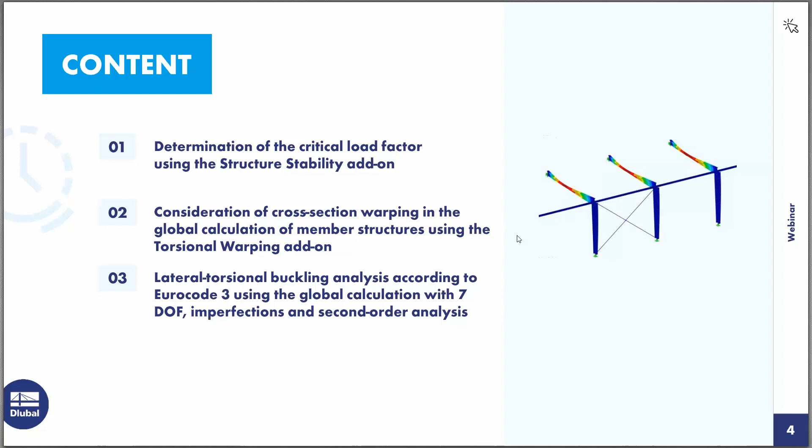The first thing we want to look at is the structure stability add-on. Here's a short overview of its features. We can use the structure stability add-on to determine critical load factors for our structures, and calculate models consisting of member, shell, and solid elements. In this webinar I'm going to present members in the structure stability add-on because we also want to show the combination with the 7 degrees of freedom calculation. I think shell elements and solid elements will be part of another webinar in the future.

Another feature of the structure stability add-on is the nonlinear stability analysis. We use incremental loading to also calculate nonlinear systems. There's also an option that helps determine the mode shape of an unstable model so we can find the cause of the instability. We will look at this in the webinar today. We can also have a graphical representation of the stability mode shape and use it as a basis for determination of imperfections.

In the first example, I want to use a simple model in RFEM to show you the basics of the input for the structure stability add-on, and also which results we will get from the calculation with the structure stability add-on.

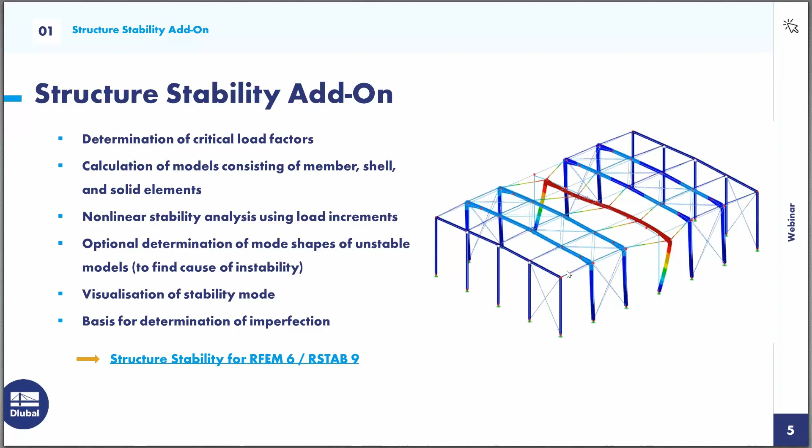So I will switch to RFEM and we will have the first example. It's a very simple example in this case, a simple steel frame with rigid frame edges and simple supports. Now we have one loading condition, so we have vertical loading and a horizontal load. We want to look at all the settings necessary to perform a stability analysis with the structure stability add-on for this example.

First, if you want to use the structure stability add-on, we need to activate it in the base data dialog. So I go into the edit model base data dialog, and then we have this tab for the add-ons where we can activate the structure stability add-on.

You have probably noticed that in the main tab of the base data, we have chosen the model type 2D. So if we have chosen only this 2D model type, the structure stability analysis will also be performed in this 2D plane stress environment. So in the first step we will see only mode shapes for this 2D structure.

Now that I have activated this add-on, we will see in the data navigator that there's an additional stability analysis setting. Without the stability add-on we don't have this setting, but now it's here with two predefined stability analysis settings already.

If we open the first one by double-clicking on it, we see that in the stability analysis settings we can set all the options we want to consider for our stability analysis, including the important choice of stability analysis type.

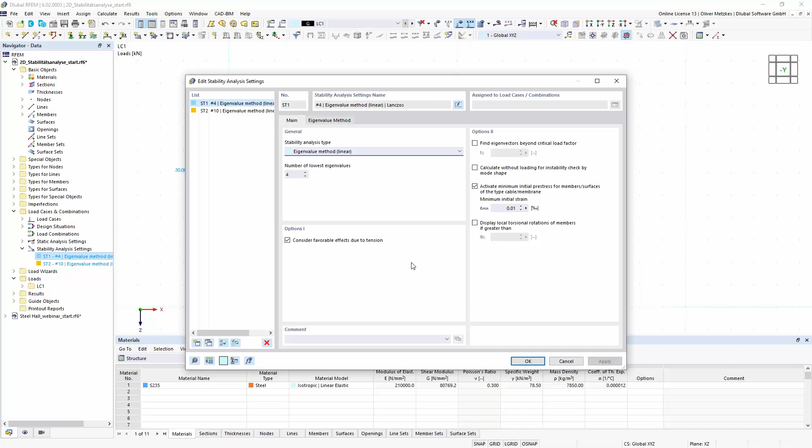We have this linear eigenvalue method for determination of the critical load factor, and also an incremental method for calculating nonlinear systems. In my example, I only want to use the standard eigenvalue method for the linear system, and I don't want to change the other options for now.

When we have our stability analysis setting, we can assign it to our load case to start the structure stability analysis. I can edit my load case number 1 by clicking the Edit Load Case button, and then we see that if we have this stability add-on activated, we have an additional option: Calculate Critical Load Structure Stability Add-on.

If we activate it, we can choose from the drop-down list our corresponding stability analysis setting that will be applied for our stability analysis.

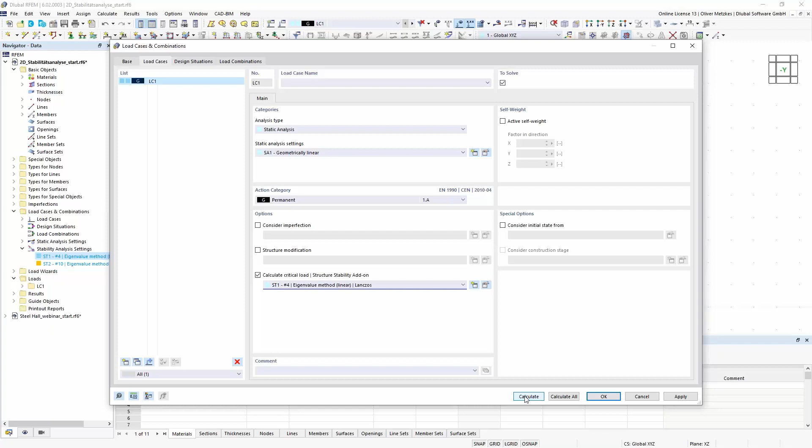If I calculate now my load case number 1, we will see in the calculation diagram that first the static analysis is performed, and that is used as a basis for the stability analysis. Once calculated, we get the internal forces and support reactions for the static analysis, and we can also switch to the results of the stability analysis.

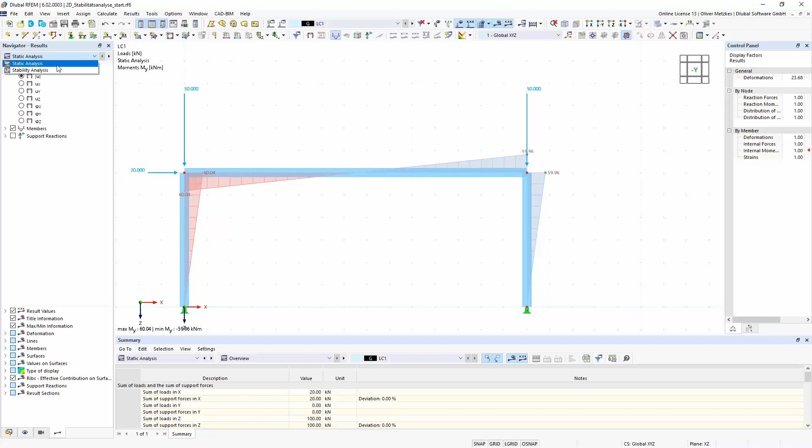In the navigator for the results, we have a drop-down list where we can switch between static analysis and stability analysis. If we switch to stability analysis, we will see the graphical representation of the mode shape, which by default for the members is represented by a line display.

We can also choose the display mode. Here in the navigator for the results, we have options at the bottom. If I choose to display my deformations for the members by colored sections, I will get this colored representation with sections, which is mostly easier for imagining the mode shape.

I also get the results in tables. In the result tables for stability analysis, I will see my critical load factor corresponding to the first mode shape. For this example, the first critical load factor is 33.6, meaning that if I multiply the load of load case number 1 by 33.6, I will get stability failure with this mode shape of my simple frame.

So that is the result I get, and I also get further mode shapes according to the setting I have set in the stability analysis settings.

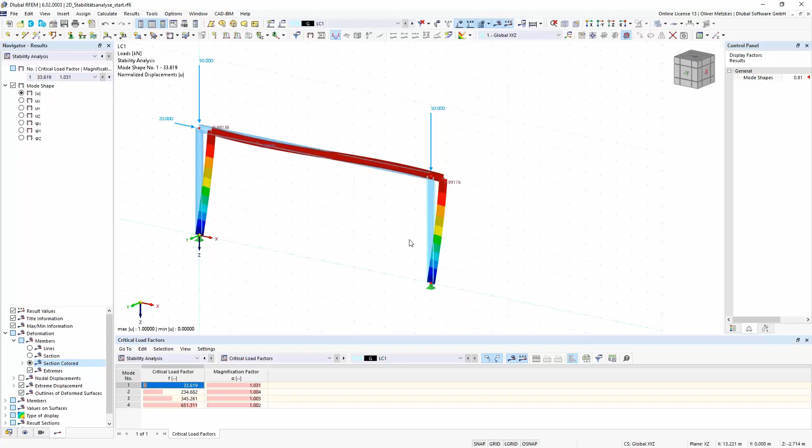Now, I have said this is only a 2D structure, so the first mode shape is this in-plane flexural buckling of the frame, and I don't get any out-of-plane buckling shapes. If I also want to consider out-of-plane buckling, I can go into my base data dialog and change the model type to 3D.

I will do so. And then I can just try to calculate it again. I will see that I have not changed anything with my support conditions.

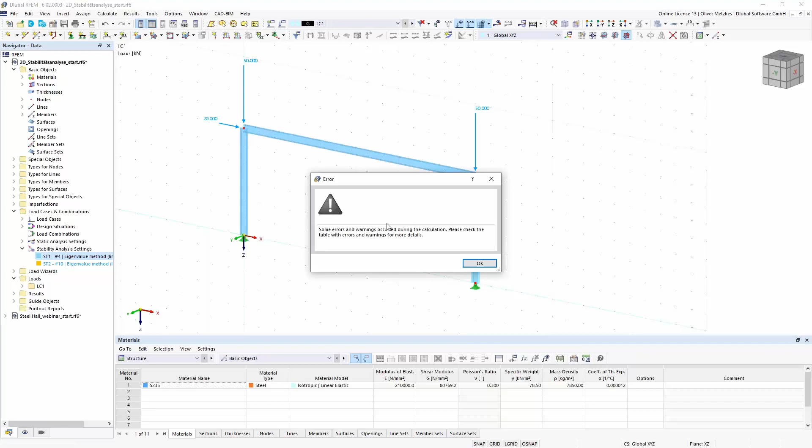So the result of the calculation in this 3D model environment will be an error because the structure is unstable. For my easy structure, it's very easy to determine the cause because I have not changed my supports. I have simple supports here, but I don't have any support in the out-of-plane direction, so it would be easy to say there are supports missing.

But also if you have more complex models and get this error for instability, the structure stability add-on can be helpful. As mentioned in the overview, there's another option: if we go into the stability analysis settings, we have this option for calculation without loading, for instability check by mode shape. We can use this method if we think there may be an instability due to modeling issues, if maybe you have forgotten a support, or also if you have nonlinearities.

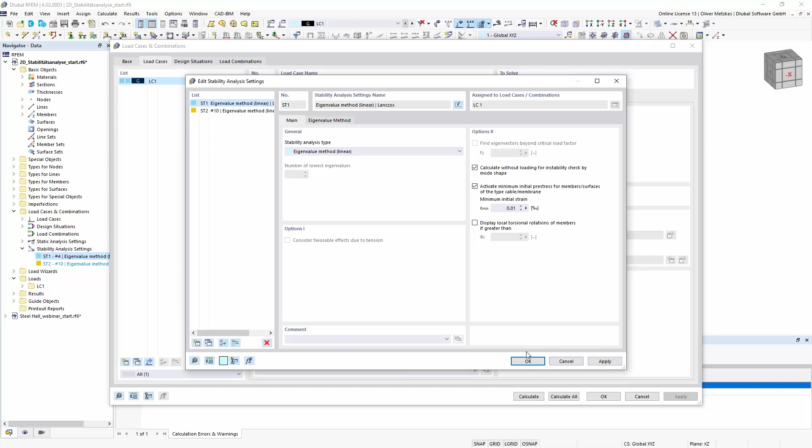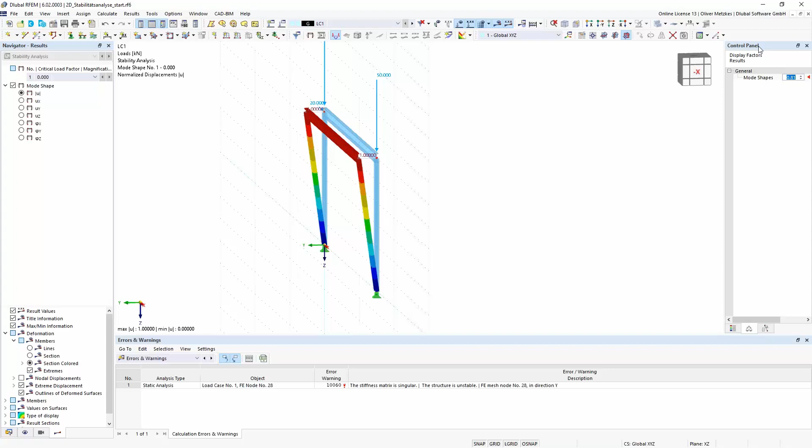Okay, to check if it's maybe a modeling problem that your structure is not stable, you'll get the mode shape of the unstable structure and can easily see what the problem is. In my case, I don't have any support in the out-of-plane direction, so the frame will have high deformation with no restraint, and it won't be a stable structure that can be calculated.

This option is in the structure stability add-on that can help with modeling issues causing instability. In my case, it would be easy, I just wanted to place some supports here, so I will have the supports in the Y direction at the frame edges. I select the Y direction and assign it now to my frame edges, here and the other one.

Now I can change the setting back so that I calculate my mode shapes with loading to get the corresponding buckling shapes. I will calculate it again, load case number 1, now also in the 3D model environment, so I would expect to get also out-of-plane buckling shapes.

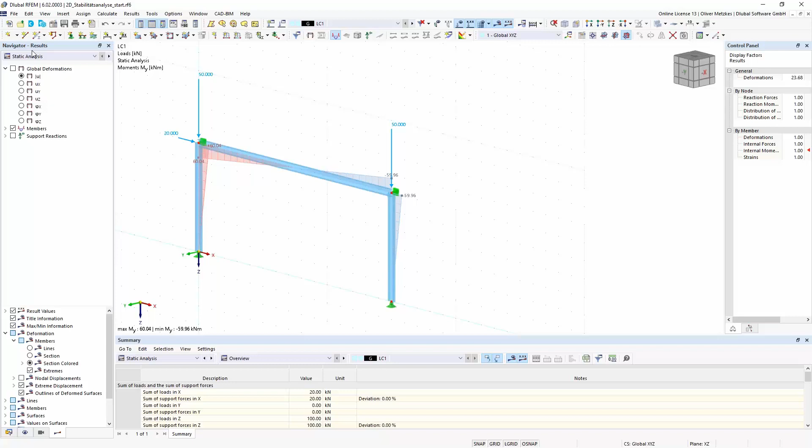I switch to stability analysis results, and now I see that the first mode shape is no longer this in-plane buckling, but now we get also out-of-plane buckling for the beam and also for the columns. For example, for this column, I now get this mode shape for out-of-plane flexural buckling with a critical load factor of 13.

So the result of the stability analysis add-on is not only the critical load factor and the mode shape, but we also get the calculation of critical loads and of buckling length. If we go into the result table, results by members, we also have additional tables like effective lengths and critical loads by member. Using this load amplifier, the stability add-on automatically calculates critical loads for each member and then determines effective lengths and, corresponding to the member length, also effective length factors.

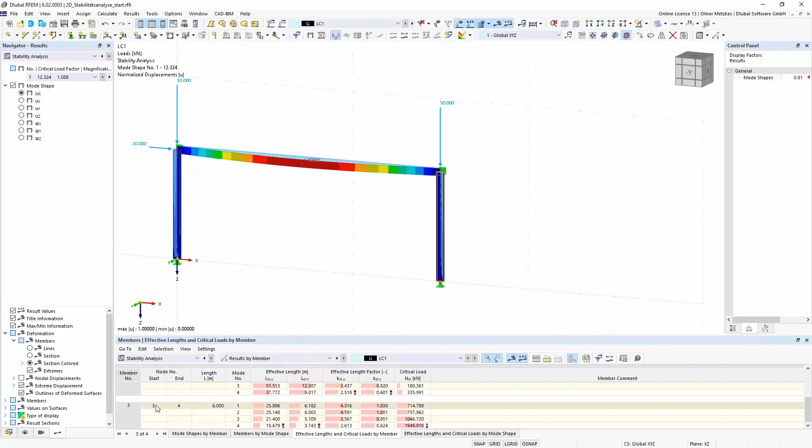So if, for example, we want to look at the effective length of this column, I click on it, it's member number 3, then we have to look also at results for mode shapes where this member is affected. Mode shape number 1 would be for the beam, but mode shape number 2 is the one for out-of-plane buckling of this column.

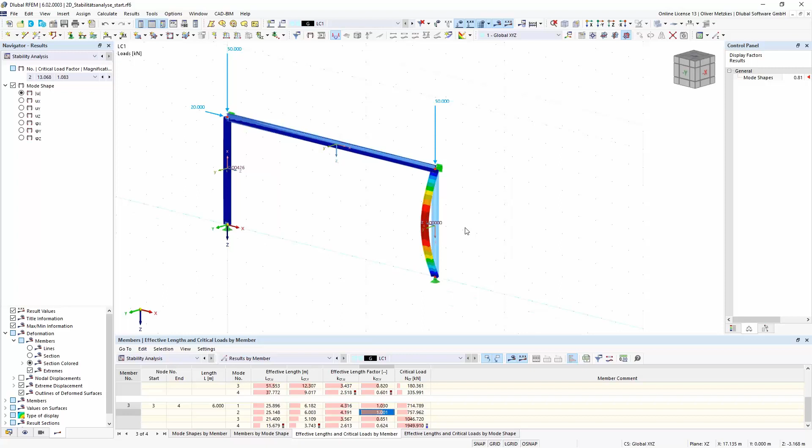As it is out-of-plane buckling, it would be buckling around the weak axis. We can also display the axis system, so buckling around the z-axis, and the corresponding principal axis now would be the v-axis. So we have to look at member number 3, mode shape number 2, and L critical V. It's an effective length of 6 meters, and the corresponding effective length factor would be 1.0. That is as expected, since the critical length for this column with hinged support conditions at start and end would be the member length. So this would be the effective length for buckling around the weak axis.

Buckling mode shape number 4 is still this in-plane flexural buckling, that would be for buckling around the strong axis. So member number 3, mode shape number 4, and now it's L critical for the U, around the U axis, around 16 meters, and this effective length factor of 2.6. Those values could now be used if we want to perform stability design checks according to the equivalent member method, then we could also use these effective length factors for the further design.

So we get from the stability analysis results: mode shapes, critical load factors, and also effective lengths for the members. I think that is good, we have seen all this input on this simple example.

Now I want to also give you some hints about the behavior of the stability analysis add-on in a 3D model, so I switch to my next model for this webinar. It's a steel hall with simple frames, rigid frame edges, simple supports, and standard loading. I have simplified it a bit, so I only have self-weight and snow load, and wind loads only one per direction, so I have not considered the negative ones, for example. It's a bit simplified, but I think for our example today it's a good example.

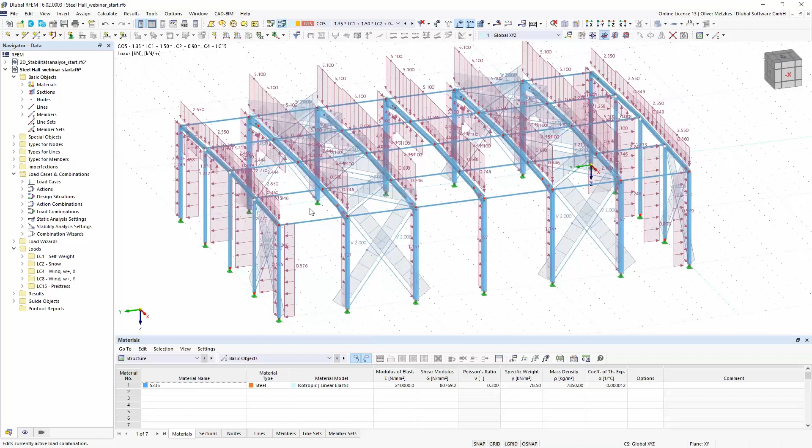Now we also have the stability analysis settings in here, and we can assign it to our load case. So if we want to determine the critical mode shape, we can select a load combination where we think we have the most governing load, like combination number 5. I can also activate this calculate critical load for the structural stability add-on and calculate it. So we can also assign this setting to load combinations and not only to load cases.

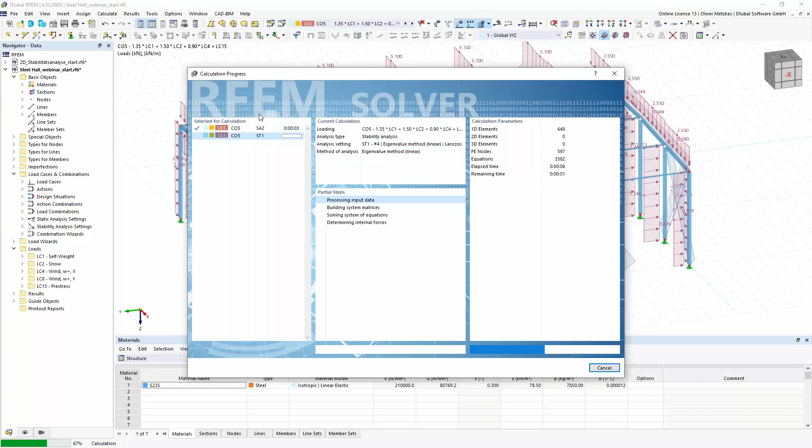So now, again, first static analysis of the load combination and then stability analysis using the internal forces that have already been calculated. So now we see the mode shape number 1 for the critical load factor of 18 in load combination number 5 is displayed here.

So now that's only one load combination. For a structure where we have lots of load combinations, it would be interesting to find out the one that would be the governing one for the stability analysis. So the wish would be to analyze the stability of all the load combinations and not only one load combination.

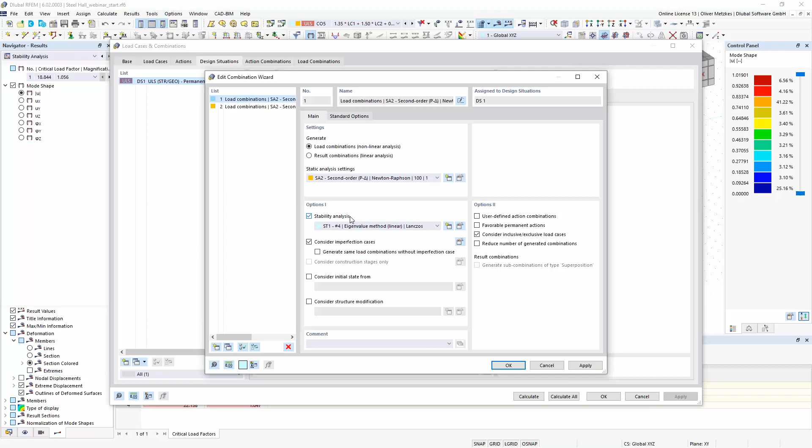So that is also possible. We can go into the combination of the loadings, so design situations. And as you probably already know, all the rules for the combinations are set into this combination wizard. So we can also modify the combination wizard, and there's an option for stability analysis. With the activation of this option, we can also activate the stability analysis for all our load combinations that are created by this combination wizard.

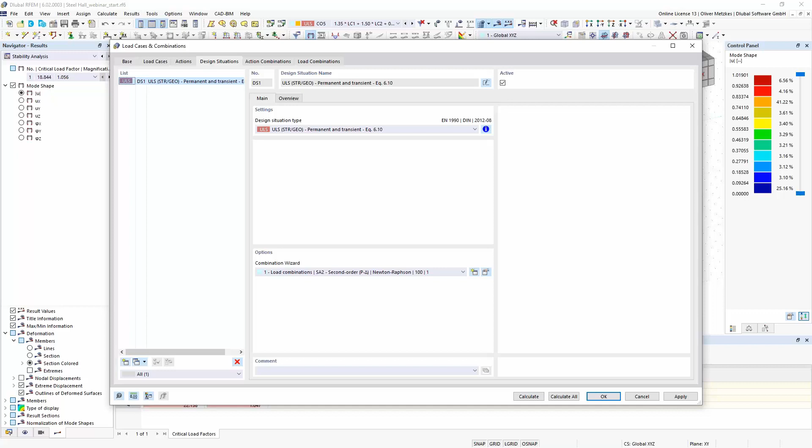So I will activate stability analysis, and I want to recreate my combinations. So I set it here again. They are recreated, and we see now every load combination will have this calculate critical load option activated. If I now calculate my design situation number 1, I will get all the results of all the load combinations, so all the combinations will be also calculated by stability analysis.

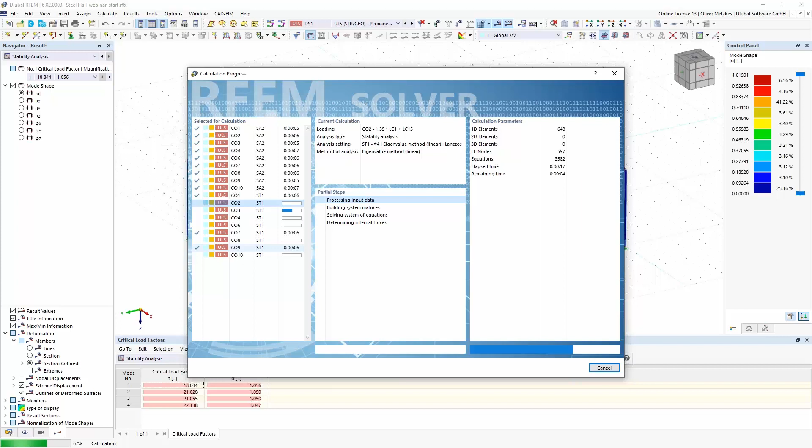In the results, I don't have to look at each combination one by one, but I also get the results of the most critical load factor. We will also look at this result in the result tables. So if I am in my design situation, in the summary of the static analysis, I will also have this additional line of minimum critical load factor. So now we see the most governing one is my load combination number 6 with a critical load factor of 11.1.

And then we can have a look at combination number 6 and the results for the stability analysis, and we will see that it's also this mode shape for in-plane flexural buckling. So that is the most critical stability issue for my load combinations that are present in my design situation number 1.

Okay, if we look at this mode shape, we see it's in-plane flexural buckling. But when we look at the internal forces, we also know that from our loading, so there's snow load, wind load, we also get a bending moment My. So we would also expect to have here a lateral torsional buckling problem of our main beam. So we haven't seen this mode shape now from the stability analysis.

And the reason is that in our standard RFEM and RSTAB calculation, we only have this 6 degrees of freedom solver implemented. So also for the stability analysis, we can cover flexural buckling, but we don't get the mode shapes for lateral torsional buckling if we don't have this additional add-on activated for the 7 degrees of freedom.

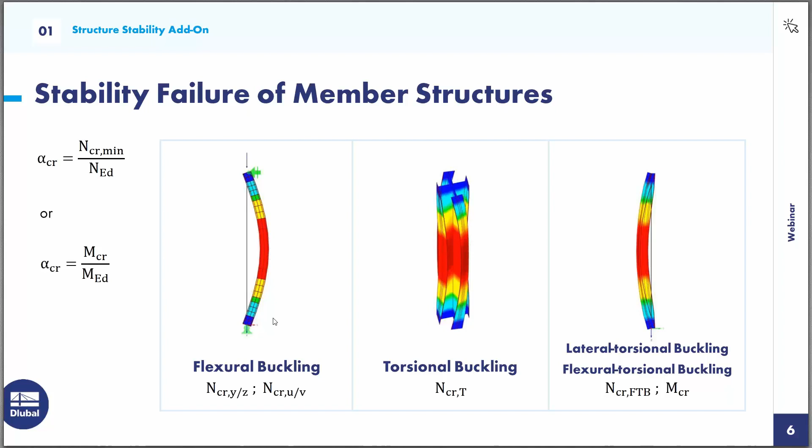That leads us to our next topic, the torsional warping add-on, 7 degrees of freedom. In general, we can use this add-on to consider the cross-section warping as an additional degree of freedom in the calculation of our member elements. We can use it also in combination with the structure stability add-on so that we can determine critical load factors and mode shapes for stability modes like torsional buckling or lateral torsional buckling. The whole add-on is fully integrated in the programs RFEM and RSTAB.

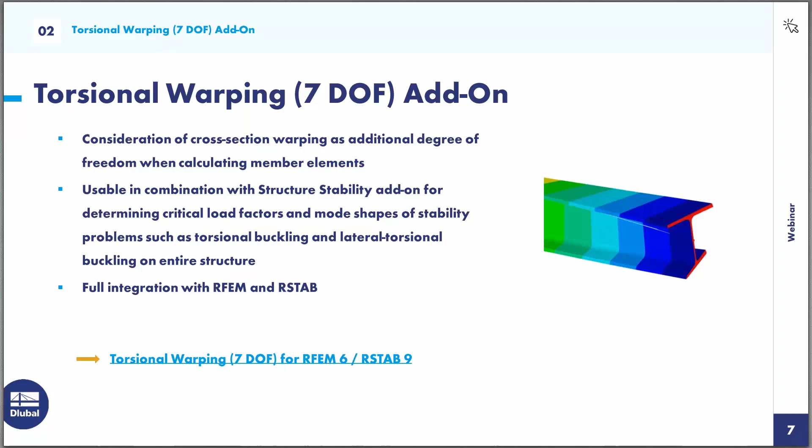For example, for channel sections, we can't use the equivalent member method according to Eurocode 3. We would need to consider the lateral torsional buckling problem by using second order analysis with 7 degrees of freedom and also consideration of imperfections. We will also look at this lateral torsional buckling check later. And we can use this add-on to consider it in the stability analysis of the global model so that the stiffness of all the connected structural elements is considered correctly.

Okay, now I want to begin with a very simple example. The example I want to show now is a craneway girder, which I want to model in RFEM 6, and I want to show all the necessary input for the application of this torsional warping add-on. So I just want to create a new file, and it would be this craneway girder, and I want to activate the add-on torsional warping.

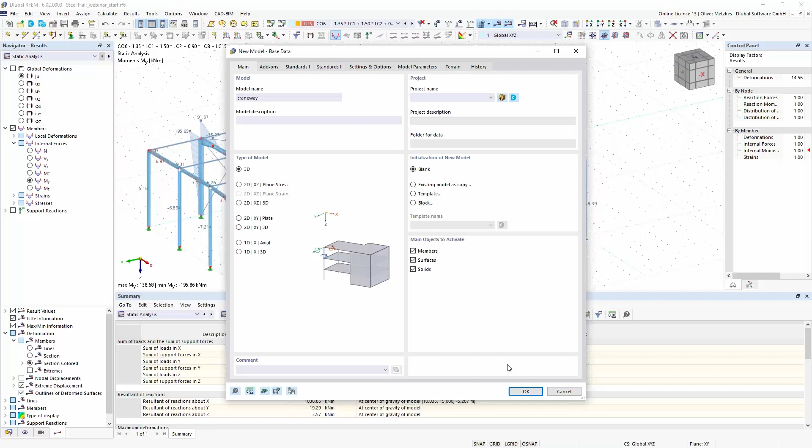As I want to calculate a craneway girder now, I also changed the load case classification for the craneways. In this example, I don't want to deal with all the necessary design checks for the craneway girders, so we don't have them implemented yet in RFEM 6 - no fatigue design checks, for example, and we also don't have this moving load situation. That will be implemented later. But now I only want to show this example because then we can look at all the details for the calculation with the warping torsion add-on, because we will get this torsional moment inside our craneway girder.

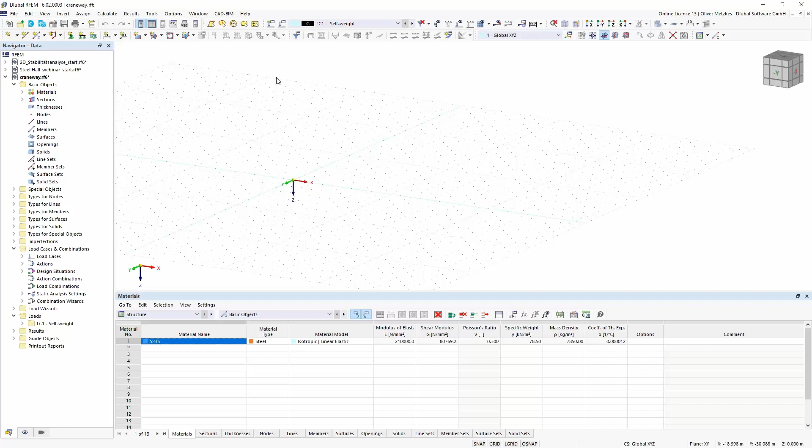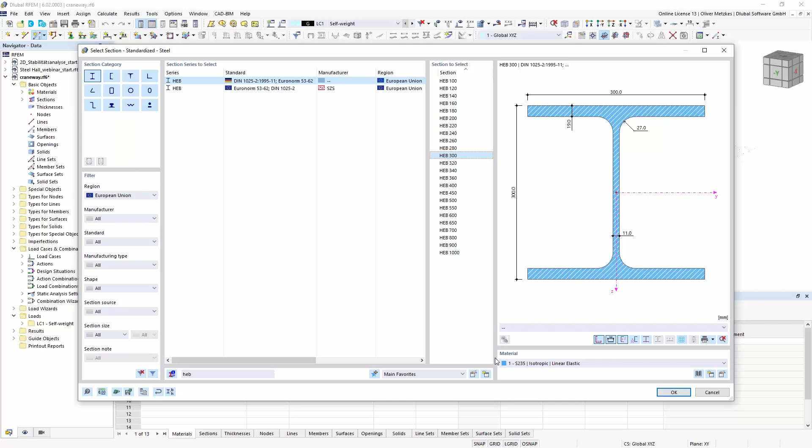Okay, it would be a very easy example for the beginning. We will start also with an I-shaped section. I want to have an HEB 300, so I just select it from the library, and I use this search function at the bottom to have it only in my list, and then HEB 300. For the material, it should be an S235, so that is already okay with the default material for me. I confirm the setting and create my member.

I want to have it with 12 meters of length, so I can just pick the points of this line grid here. Okay, so that is my member, and now I want to place supports. So I want to have also a torsional restraint at the beginning.

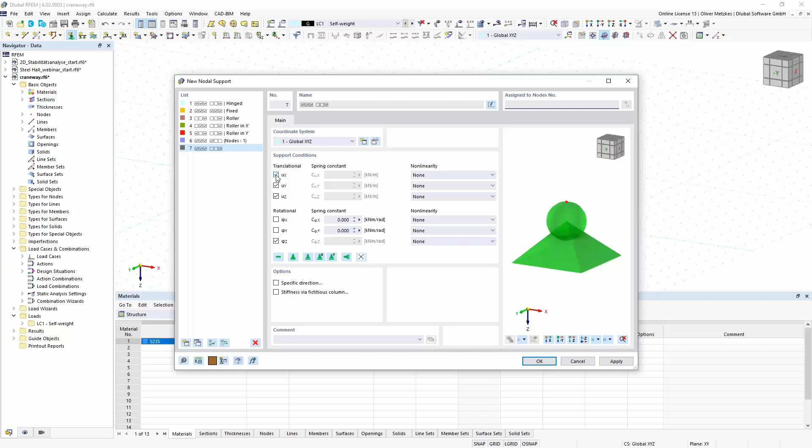Okay, so all the deformations and also the rotational restraint around the x-axis, and also another support at the end. It will be the same, but now I don't have this longitudinal deformation fixed.

I also want to consider an additional support in the middle, so it should be a two-span beam. And now I use this function of dividing the member.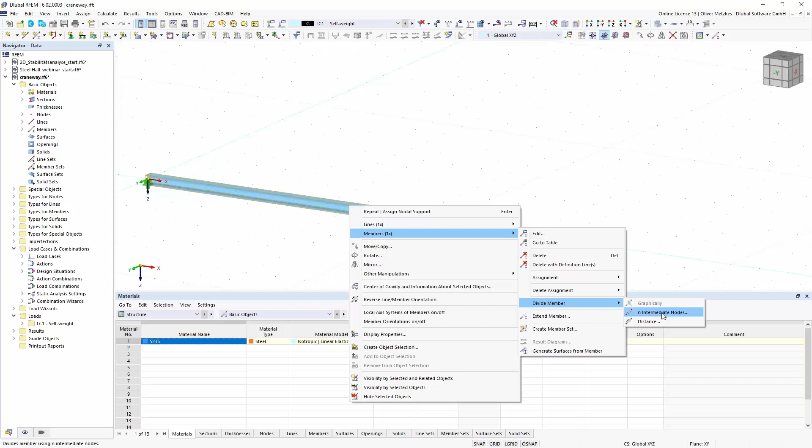I right-click the member, then in the members I choose this divide member by intermediate nodes. I can select one intermediate node, and now I want to use this option, create on member nodes without dividing the member. That is important for the warping torsion analysis, because only if the member is considered as one member without division, then also the torsional warping will be continuous in this member.

So if I would divide the member, then those two members would be independent. We will later also look at this problem, and there are also solutions for that. But for now, I want to use this option to create only the nodes on member.

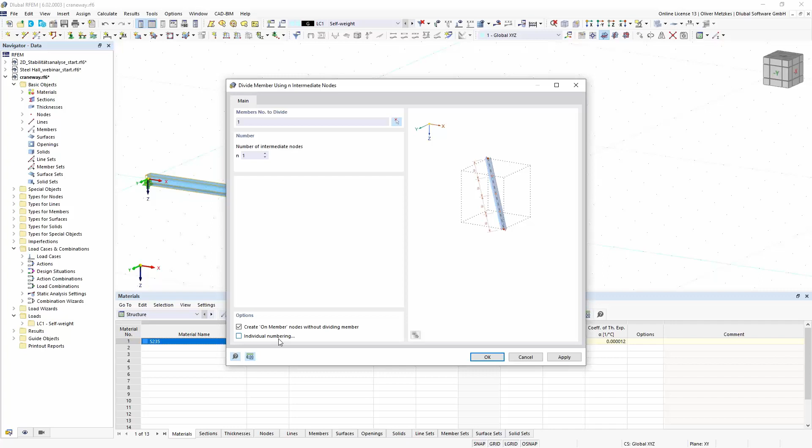Okay, so now I have this node on member, and I also want to have another support here. So I just copy this one also to the middle. Okay, so that is my beam and also the support conditions.

And probably you have noticed that in the support conditions, even if we have activated 7 degrees of freedom, we only have this 6 degrees of freedom for the support conditions. So in our calculation, we only have this torsional warping degree of freedom for the members. So it is seen just as a member problem.

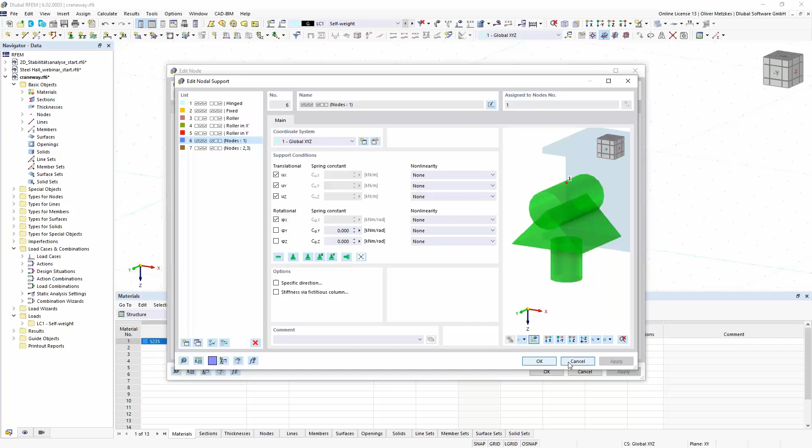And also as a member property, we would need to define warping restraints, for example. So the nodal supports, they could also be used on surfaces, for example. So we have decided not to offer the warping restraint as a nodal support, but as a member property, because it's also only valid for the members.

And for this, we can edit the member, and then we have this transverse stiffeners. This additional tab is used to place transverse stiffeners for the design and also supports for the warping torsion analysis. So as it's like always in RFEM 6, we have this additional tab, and now we can create types of transverse stiffeners, which could then be assigned to the different members.

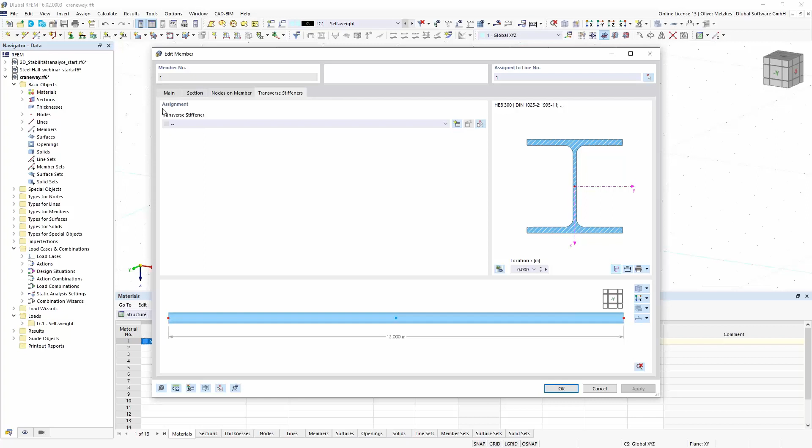So now we have this new type of transverse stiffener, and we can see as a stiffener type, we can select between different options. So we can place, for example, end plates at start at end, or also flat stiffeners, and also the warping restraint.

So in my example, I just want to place a full warping restraint at the beginning and at the end, and that is possible using this warping restraint option. There's the user-defined restraint also available, but I want to use the full warping restraint here.

I set one at the position of 0 and then a second one at the end. So I use the relative input by clicking on this button, and at 100% of the beam length I will have the second full warping restraint.

I also want to add a flat stiffener in the middle where I have my other support. So at 50% I have my flat stiffener with a certain material and thickness, so 20 millimeter, and also the width of 120 millimeters. You see that automatically the program calculates the resulting warp spring that will be used in the analysis. So from the input of the thickness and the width, we will get automatically with the cross-section properties the warping spring that will also be considered in the analysis.

So you can use this type of member transverse stiffeners to set all the warping restraint conditions for your member. Okay, we also see a certain graphical representation. So this is the full warping restraint, and here we have our stiffener placed in the middle.

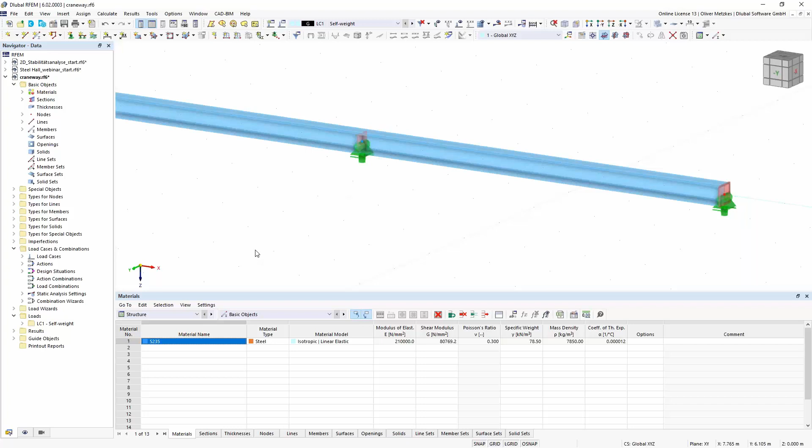Okay, so now we have our system, and we would need some loading. And in the load cases, we already have created this load case number 1 for the self-weight. And the self-weight is applied automatically by using this self-weight factor in the Z direction.

By default, if we have switched to warping torsion analysis, all the loads are applied also in the center of gravity. So also the connection between all the adjoining members and the supports, they are assumed in the center of gravity. And also the loads by default are applied in center of gravity of the cross-section. So that is a difference compared to the standard 6 degrees of freedom calculation in RFEM.

So we always apply the loads in the shear center, but now for warping torsion calculation, this additional torsional moment is important, so it's really applied in the center of gravity.

We have already our self-weight loading, and now I want to also create some crane loading on my beam. As I have said, we don't have this moving load implemented for now, so I could create it by hand, and I will just show it as an example.

For this craneway loading, I will use the member load for now, and I use the concentrated load distribution type, not the uniform one. I want to have 2 loads, so I think this load application would be appropriate here. I have 80 kilonewton of vertical load in this example with a certain distance, 3.5 meters, for example.

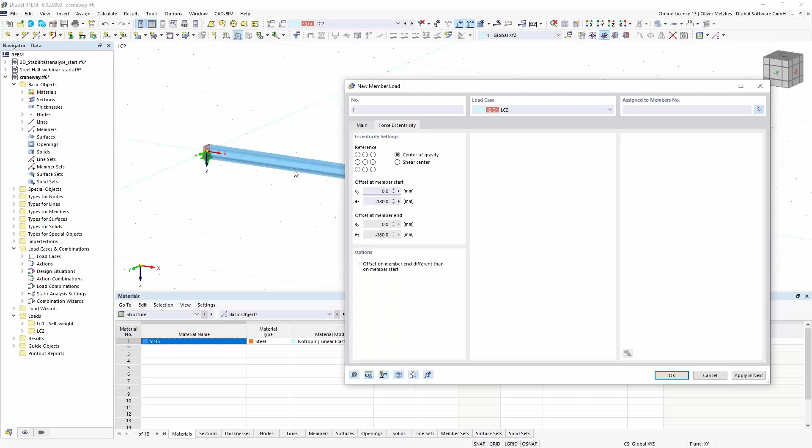But as I have an additional eccentricity, I just type it in here as a value, negative because the local z-axis is going downwards. Okay, I can just apply this load at the member number 1.

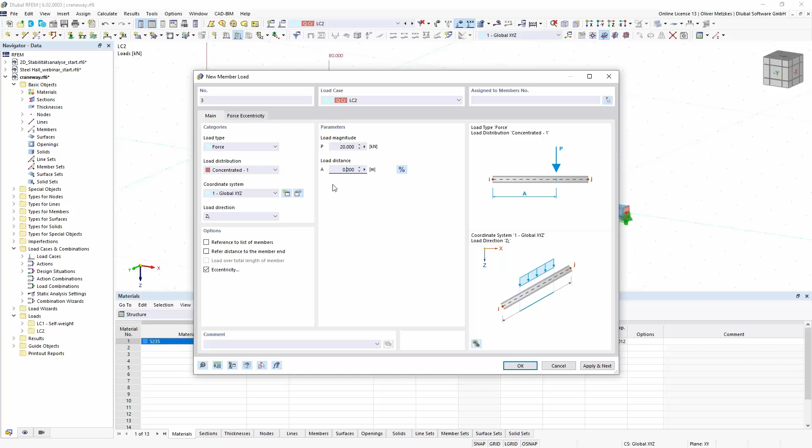And I could also apply another one, for example, a horizontal load, so just one load with 20 kilonewton at the same load distance, now in the y direction, still with the same eccentricity. I apply it to my member, so I can create the load manually like this.

So now I would need to copy the load cases because I want to have it moving, and then also change the distances for the first loading point and the second loading point. That would be possible, but yeah, it's quite a bit of work.

So I want to use another possibility here. You have probably seen in previous webinars that now in RFEM 6 it's always possible to use JavaScript code for the creation of the model. If you activate the script manager, we have it here in the list, you will also get example scripts for this creation.

For example, in the examples, we have a simple beam one. If I just open it with the text editor, we will see that there are also examples for creation of materials, how to create a node or a member, and for our case now, the important thing for the creation of a concentrated member load.

You see we can create this member load by JavaScript code, also set this load distribution as concentrated, the direction, for example, and a certain load magnitude. So basically all the options we have in RFEM, they are also available in the scripts.

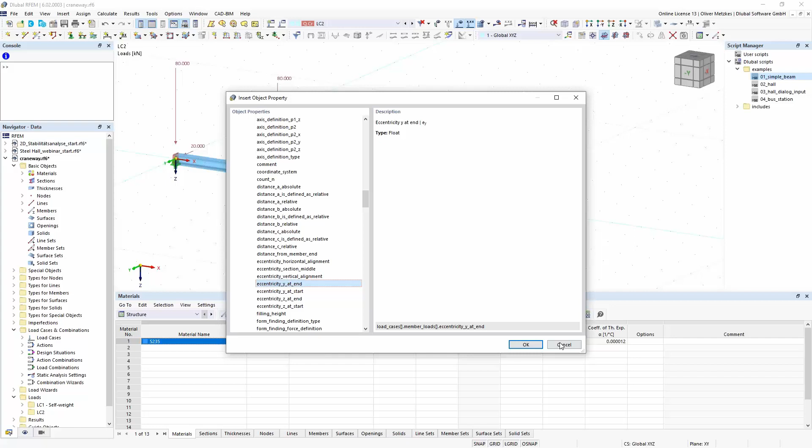So all the distances, also eccentricities, and you see how you can apply it in the code. That is always good if you need to find a certain property and how to set it. And then it's relatively easy to create this JavaScript.

So from this simple beam, I have created another one for my simplified craneway loading here. I have certain input data with a distance between it, and then I set my concentrated load for the horizontal load with my eccentricity of 180 millimeters.

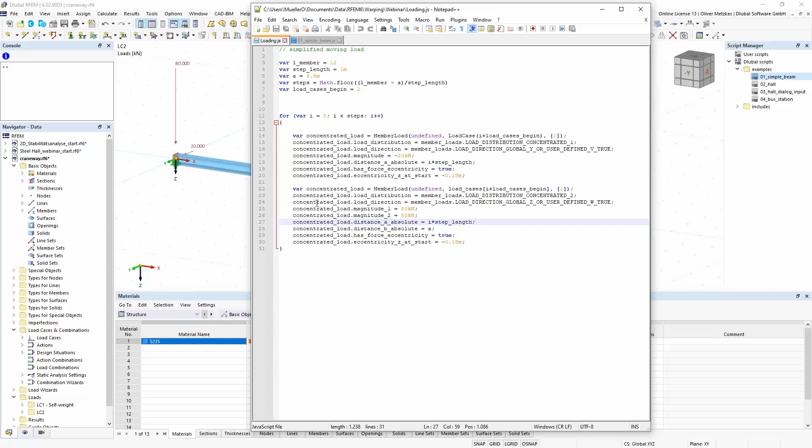And then also this concentrated load in vertical direction, as I have done manually, but now it can be done by JavaScript. So then I have this for loop that creates automatically the load cases and the loads in each load case. I think that is a very easy method, and not too complicated with this simple code snippet. To apply it, you can just copy it here into this console, paste it.

Before applying it, I want to delete this load case number 2 again, because it will be created by the script. With the return key, I can just start the script. And now you see in my load case list, I have created those additional load cases with my member loads. If I click through them, you see it's this moving load, which I have simplified, applied by this JavaScript code.

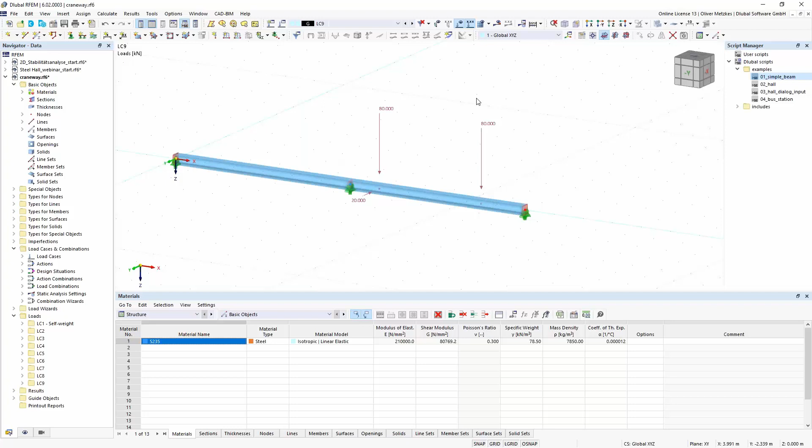So that's also an easy solution. If you have things that you want to automate, which are not implemented by default in RFEM, you can also use JavaScript to create the objects. Now I have my load cases, and I want to change the action category for them.

So it's from the cranes, and they are alternative loading. So I will just change this action type to alternatively.

Then we have our design situations and the combination rules. I think you already know that from previous webinars, like the steel design one. So in this example, I don't want to show it in detail, and I also don't want to look at the design situations for the deformations, but just for the ultimate limit state.

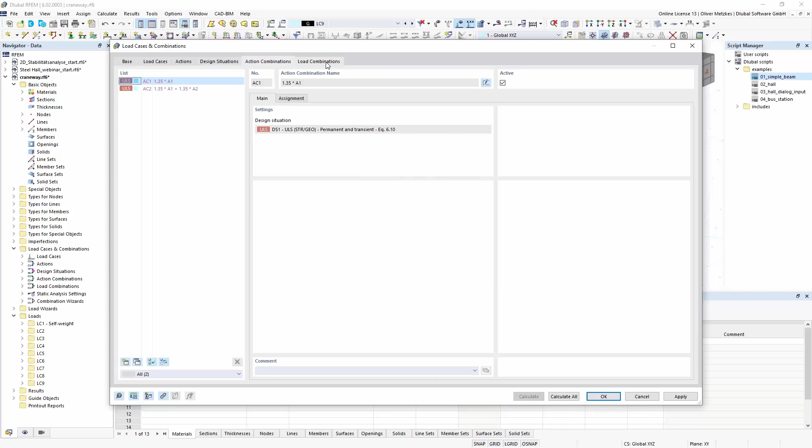Now I have created my load combinations. So for each load step, I will have this combination. If I now calculate this design situation, I will get the results for my load combinations with the warping torsion analysis activated. So we will have a look at the results.

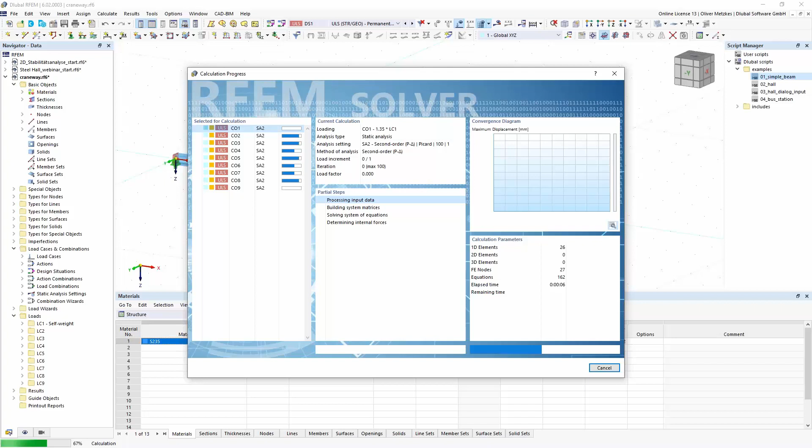And now we also expect to get the torsional moments correctly. So primary torsion, secondary torsion, we will get it here in the result navigator. In the internal forces, you will see we have this additional choices. So the bimoment, for example, and also primary torsion, secondary torsion.

And if we look now, for example, at a certain load combination, like this one, we have here our eccentric load, and so we have here this change in the secondary torsion because this load is applied. Also the warping deformation, we will get it as a result in the local deformations.

Now we have calculated our load cases, and that could be used now for the steel design, for the cross-section design, without the stability analysis.

If we now also want to perform our stability analysis, so in this case it would be a lateral torsional buckling check, we want to consider also the torsion correctly, so we would need this add-on with 7 degrees of freedom, a calculation according to second order theory, and also the imperfections. So that would be then our lateral torsional buckling check.

So in this case, I want to create the imperfections from the stability add-on. So I want to use the mode shape and scale it to the certain value that I can easily create my imperfection. So we'll close this script manager again.

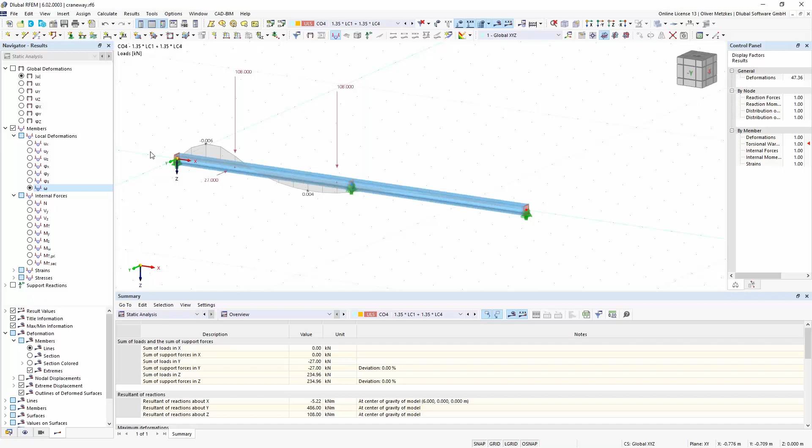But in my example, it would be easier to create this imperfection out of a mode shape, for example, of my self-weight load case, because then I would have this symmetric mode shape which I would need for my imperfection value. So in this example, I just want to apply it for this self-weight.

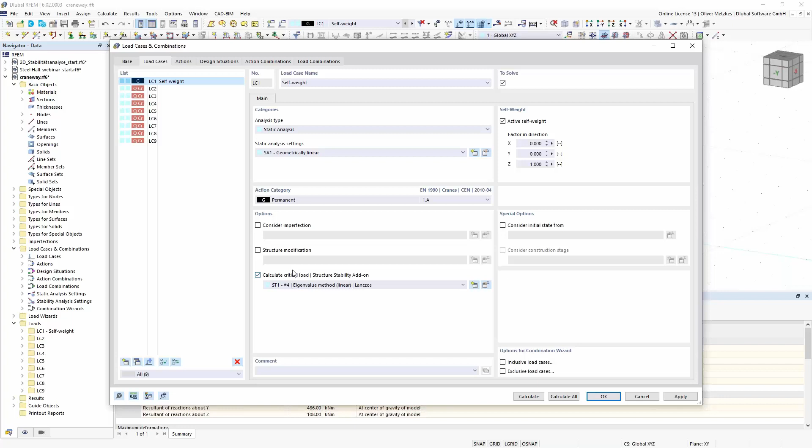So I activate this option, calculate critical load, and then calculate my load case number 1. And as we have now activated the torsional warping add-on, we now also expect a lateral torsional buckling shape.

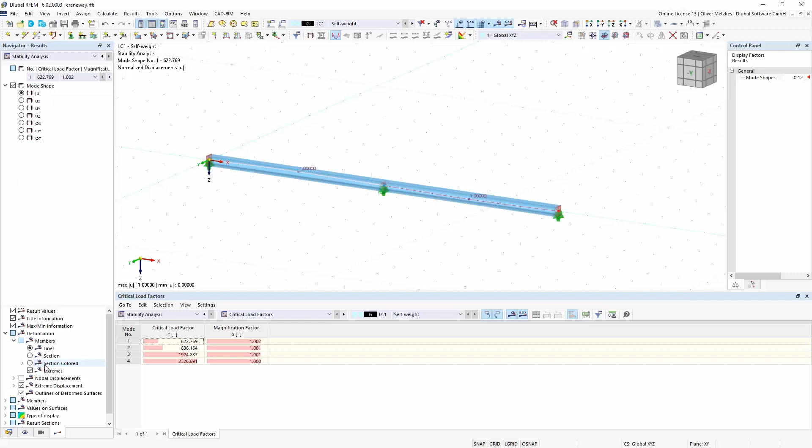So not only flexural buckling, but we will see it here if I activate the deformation by colored sections. And then we see now with the 7 degrees of freedom add-on, we get this lateral torsional buckling shape.

And now I want to use this one to apply it as an imperfection. For that, I can go into my navigator data and create a new imperfection case. So in this imperfection, I right-click the imperfection case to create a new one.

And if we have the stability analysis add-on activated, we also have the imperfection type of the buckling mode that we can use. If I create imperfections from a buckling mode, I first have to select the load case. So in my example, it's load case number 1 and also buckling mode number 1.

And now I need to set the imperfection magnitude. So for our lateral torsional buckling design check, the standards are giving also imperfection values. So in the Eurocode 3, you will also get imperfection values for flexural buckling and also for lateral torsional buckling.

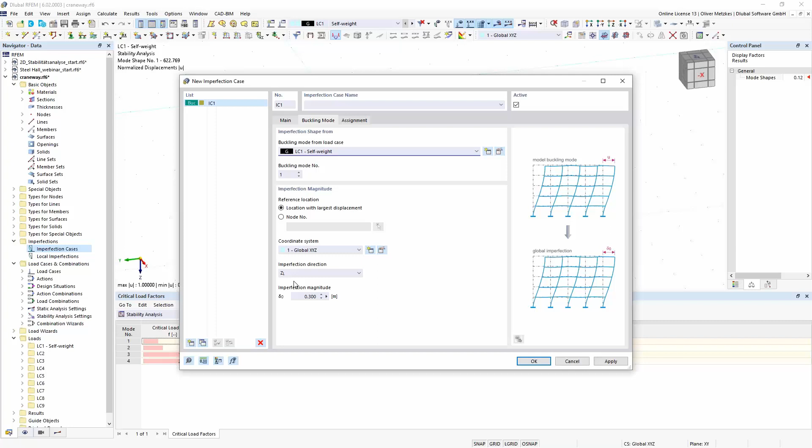And now you could also apply this imperfection. In my example, as an imperfection value, I can use 1/200 of the reference length, which would be between the fork supports in this example. So this length and 1/200 of this length will be the imperfection value that I would need to use here. It also depends on the national annex for the Eurocode, so it's always important to check your country's national annex to set the correct imperfection magnitude. So I choose the imperfection direction in the Y direction, and then I could manually calculate the imperfection magnitude, or again use the formula input, and JavaScript code is allowed in these formulas.

So now I can also get the properties of all the RFEM objects. For example, from my members, it's member number 1, I can get the length information here. It was 12 meters, and now I want half of it because the support is in the middle, and 1/200. So this imperfection magnitude would be the value that I should use. And if I now change the member length, this value would also change because it's defined by the formula.

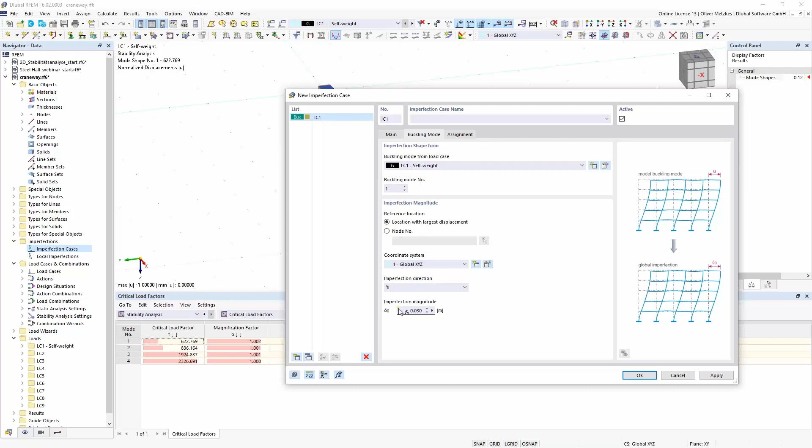In my example, I would also need to check the imperfection in the positive or negative direction, depending on the load case which I analyze. As I want to analyze all my load combinations, I want to also set this imperfection in a negative direction. That can easily be done using this group of imperfection cases. This imperfection type can be used, for example, to combine different types of imperfections. So if I have a global initial sway imperfection in the X direction and want to combine it with local imperfections like the one from a buckling shape, I can do so in this group of imperfection cases just by adding additional lines and setting a certain operator. But in this case, I just want to apply my imperfection case number 1 with factor -1, so that it's in a negative direction.

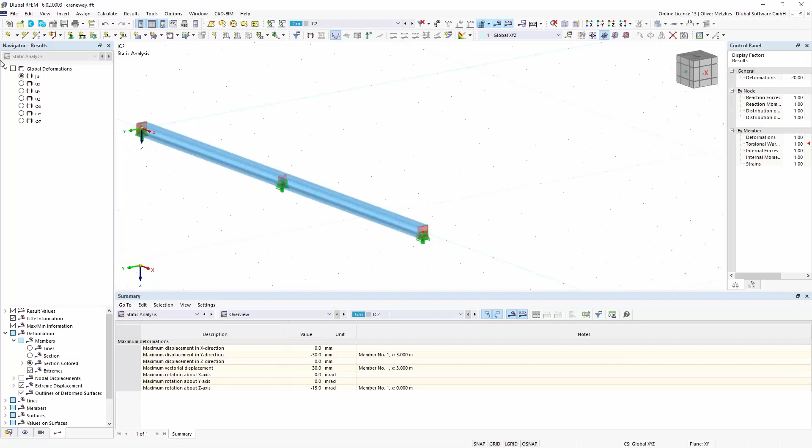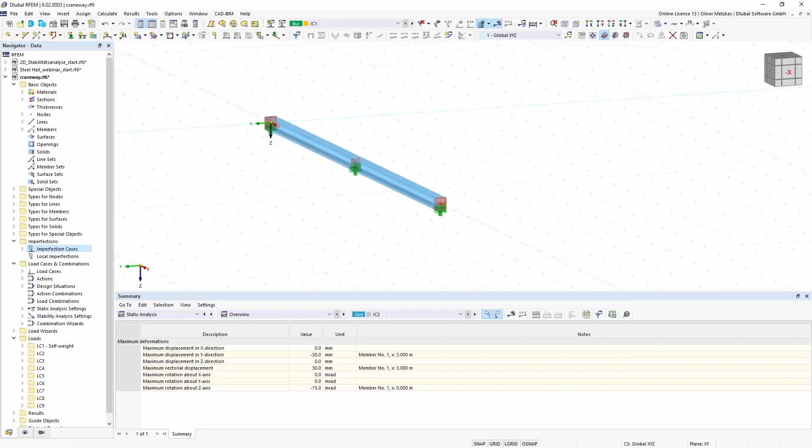I can also display the shapes of the imperfection cases. If I calculate imperfection case number 2, it takes the mode shape of load case number 1, scales it to the value, and since we have the negative factor, we will have it in a negative direction. Then we can look at the results for the global deformations. So this is my imperfection shape in imperfection case number 2. And now I can also calculate it for number 1, and you see it's just the opposite direction with the imperfection magnitude set in the imperfection case. So that's imperfection case 1 and 2.

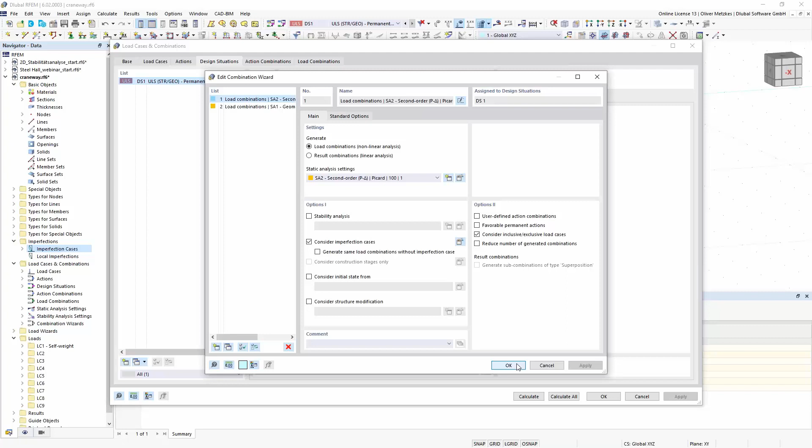I can now use the imperfection in the combination. In my design situation number 1, if I look at the combination rules in the combination wizard, I can activate my imperfection cases, and then they are also considered in the combination. So in the load combinations, we see the same loading one time with imperfection case number 1, then imperfection case number 2, and all the load cases. Now if I calculate this design situation number 1, I will get the internal forces calculated by second order theory with the imperfections and also the warping add-on activated. So I could use these internal forces in a cross-section design check, and that will replace my stability design check for lateral torsional buckling. That's possible according to Eurocode 3, and then I could use those internal forces. So all the internal forces I get in this design situation number 1 can then be used also, for example, in the stress-strain analysis add-on or the steel design add-on.

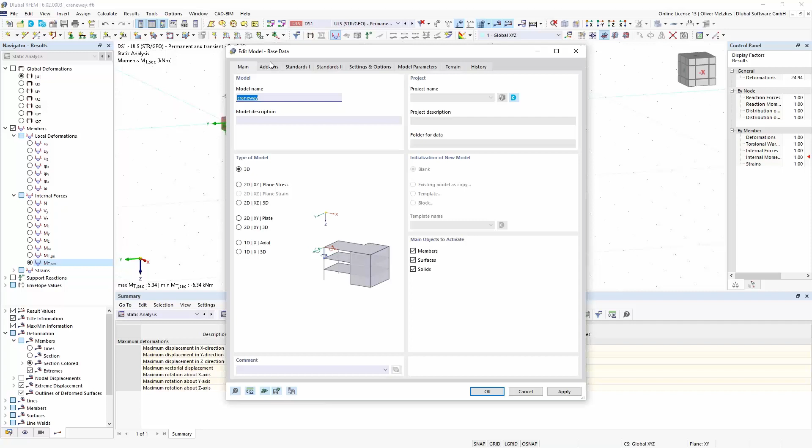I want to show that now. If I activate my steel design add-on in the base data dialog, it's also a good idea to save the structure first. So I just saved it, and then I activate my steel design add-on, and I can look in the input tables. I think you already know this input from the steel design webinar. So we have our design situation where all our internal forces are considered, then objects to design, materials and sections, which are automatically taken over from the RFEM definition. The important thing now for our cross-section design check, if you want to use it as stability design, is that we need to look at the ultimate configuration.

So if we go inside here, we can activate this option to perform the stability analysis with the second order internal forces. For that, we need this partial safety factor for stability design. Normally cross-section design checks use the partial safety factor gamma M0, but for stability design checks, we need the gamma M1 partial safety factor, which can differ depending on the national annex. So we need to activate this option.

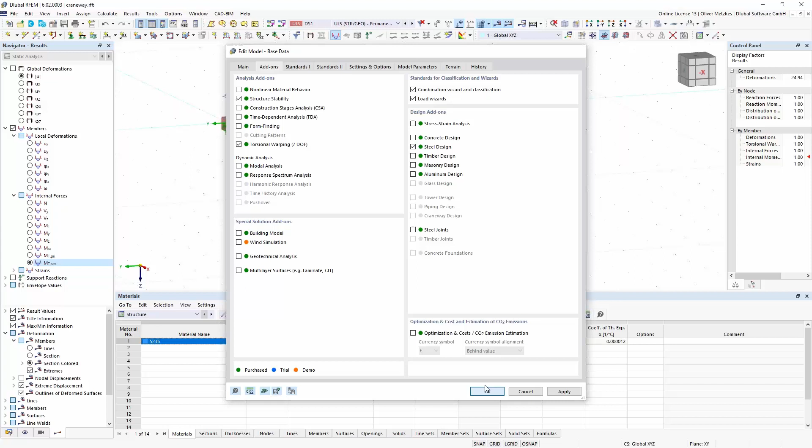We also don't need any other stability design checks, so no need to perform the equivalent member method again, because we already have all the effects in the internal forces. Now this setting is applied to our member. I see the add-on is deactivated again, so I'll activate the steel design add-on, but I think all the settings have been made. Yes, this is the correct setting with the gamma M1 factor.

Now I can calculate my steel design, and I will see all the steel design checks with consideration of all the internal forces, including bimoment, secondary and primary torsion. If you look briefly at one of the design checks, for example the most governing one, we see we are calculating the equivalent stress, considering the stress from bending moment about the strong axis, weak axis, and also the axial stress from the warping bimoment. So all necessary internal forces are included, and we use the gamma M1 factor for our cross-section design check, because it's meant as a replacement for the stability design.

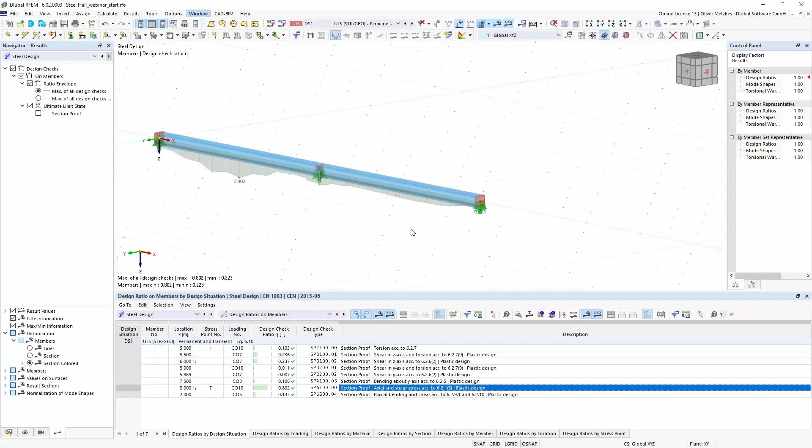So I think we have now seen how to consider the 7th degree of freedom on this simple example and what we would need as input. Now I think we can look again at our 3D model. I will switch back to the steel hall that we had before, and now we also want to check the lateral torsional buckling on this global model.

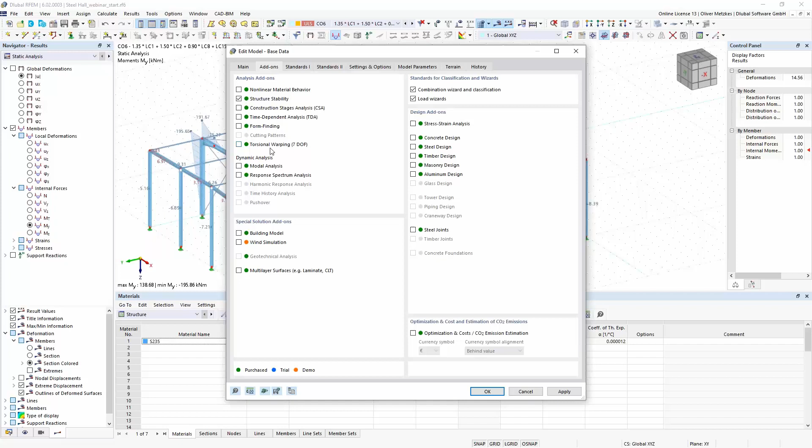For the beam girders, we would now also expect to get these lateral torsional buckling shapes. First we need to activate the structure stability add-on - we have it already - and also the torsional warping add-on. Now I just want to give you some additional hints, because if we look at this model, as we said, all members are by default independent for warping.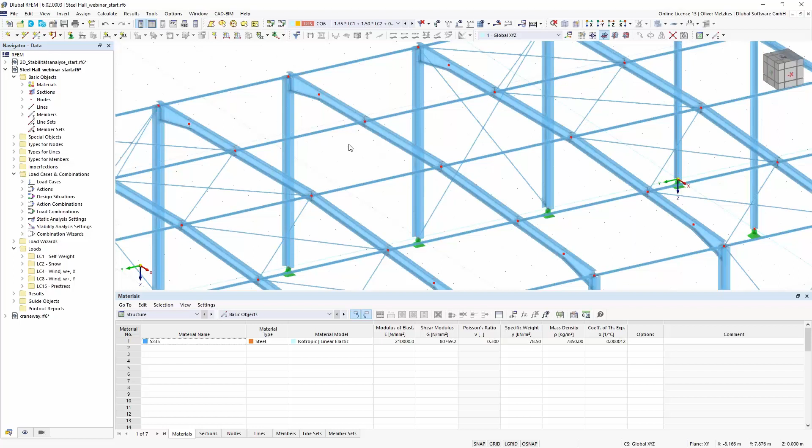So all the members are free at their edges for warping. Now we still want to see these beams as continuous, so that the warping can be continuous in the whole beam. Therefore, we would need to create member sets. That's the option if you have members which are not connected - if you don't have internal nodes, but real nodes, you can still consider them for continuous warping if you create member sets.

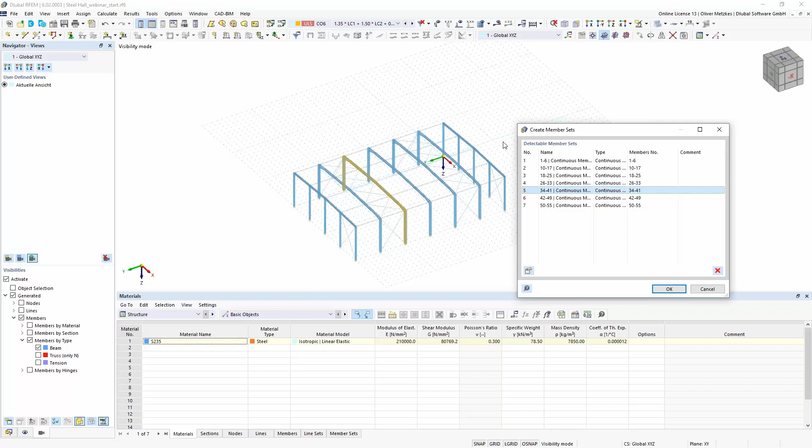So I will create the member sets. For that, I will activate my visibilities for the members to only get the beam ones. Then I can select all the frames easily, and I don't want this additional columns here - so this one. Okay, I just right-click on the members, and here I can create the member sets. It automatically recognizes that I have independent systems here, and it tries to create the continuous member sets. So you see, I can now easily create the member set for all the frames.

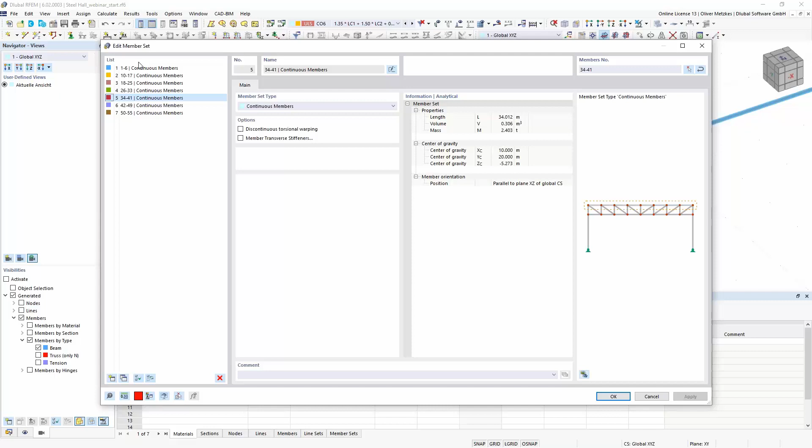So that is possible now, to consider those members also as continuous in warping, because that is the property of the member set object. If you don't want it continuous in the warping torsion analysis, you could activate this discontinuous torsional warping option. But normally when you create a member set, it's meant to have it as one structural object, so you will have continuous warping for all the members connected in one member set. That is the first important thing, that we can consider this beam as a continuous one.

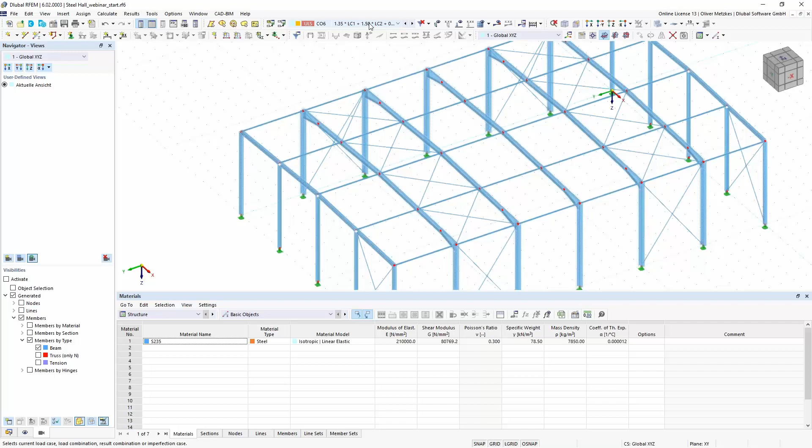And then we already know that the load application point needs to be defined by the force eccentricity. So in this example, I want to change the force eccentricity for this member load, applying it at the top flange. For the 6 degrees of freedom calculation it was not necessary, but now, if I want to consider it in the warping torsion analysis, I also want to consider this eccentricity in the stability analysis. So I just added my member loads and set this eccentricity value here.

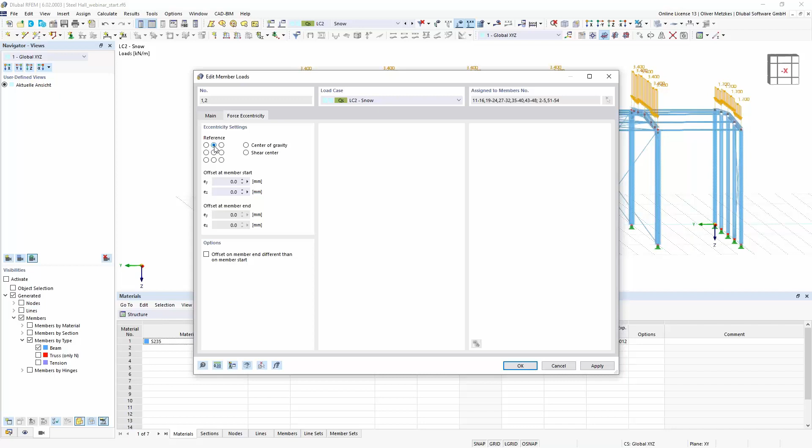In this case, I can use the simple reference point, because I just want to apply it at the top flange of the cross section for all these members. So I can use this simple reference point.

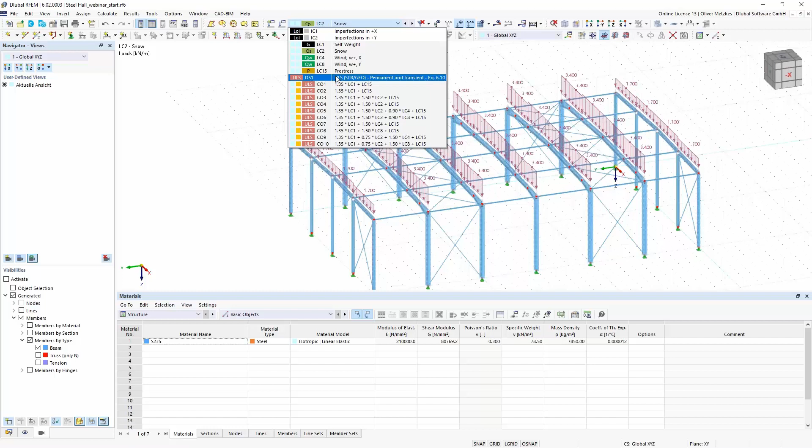Okay, so now I have changed those two settings, and I want to run the stability analysis. I think we still have it activated from the example before. So if I calculate my design situation number 1, I have my 10 load combinations, static analysis, and then stability analysis.

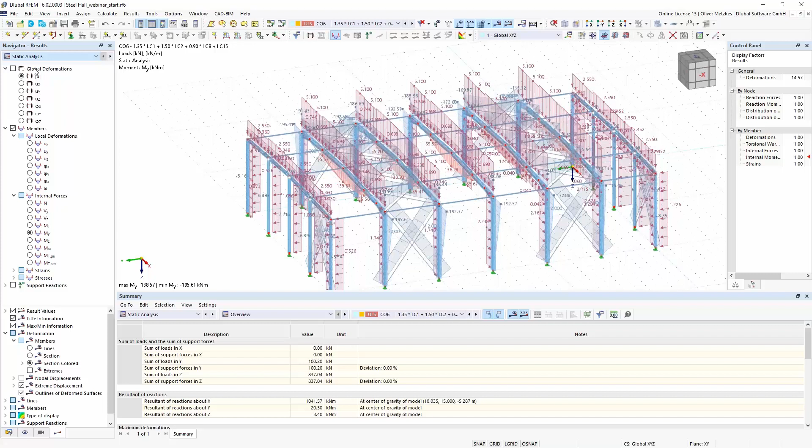And now I would expect to also get this lateral torsional buckling shapes. Before, it was only the in-plane flexural buckling, you probably remember. Now I want to look at the most governing mode shape, which would be lateral torsional buckling. So if we look now at design situation number 1, the minimum critical load factor now is not 11, but 1.4. If we look in load combination number 6, in the results for the stability analysis, then we see that now the first mode shape is also correctly found as this lateral torsional buckling shape.

And automatically, as we are working now in a 3D model, also the stiffness of all adjoining elements is considered. So already the bracings and all the couplings between the members, that is correctly considered. And so we get this critical load factor.

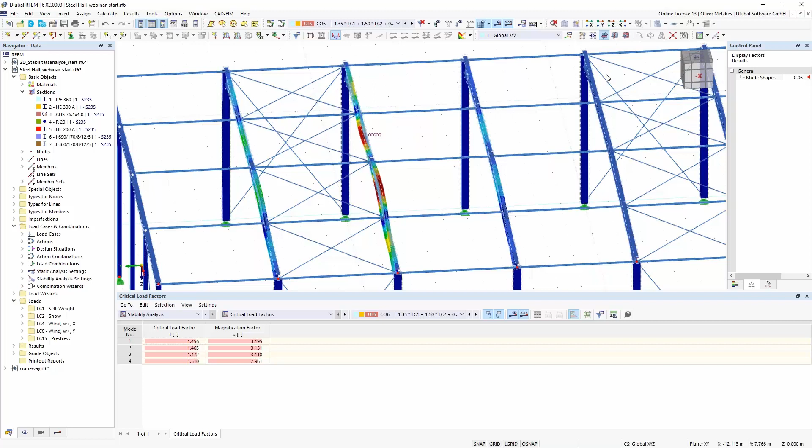So we can also do detailed stability analysis on a 3D model, for example to consider also the coupling between beams that are not equally loaded, to consider the stabilizing effect. You can also see that the structure is considered, for example in this example I changed the section of the bracing from a round section with 20 millimeters of diameter to one with only 10 millimeters. So in this example, I will just rerun the stability analysis now with bracing that has a lower stiffness, just so you can see what we will get as a result.

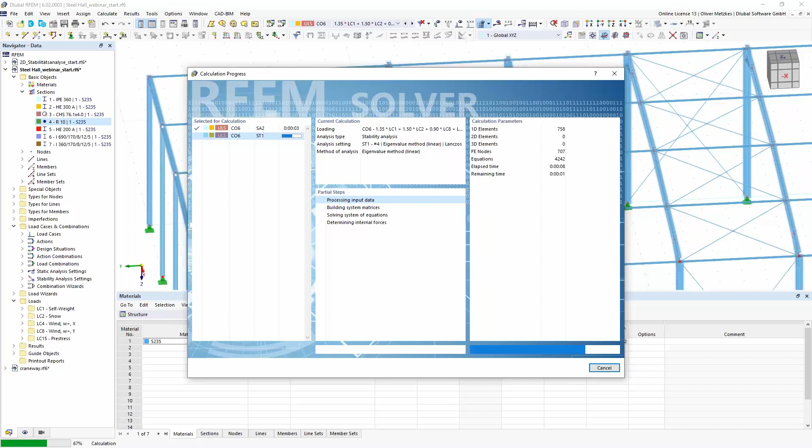So in this load combination number 6, before it was this lateral torsional buckling between the fixation of the bracing. But now we have a lower stiffness, and now it's not stiff enough to prevent this flexural buckling of all the frames. So now we have a lateral torsional buckling mode shape with critical load factor 1.1. The first one is now the most critical one with this lateral torsional buckling mode shape, not between the bracing fixation, because the stiffness is too low now. So we will have this global lateral torsional buckling here.

So you can see that this stiffness is directly considered of all the adjoining elements, and there's no need to calculate a certain equivalent spring stiffness, for example, in this 3D analysis. So you can use this combination of structural stability add-on and torsional warping add-on to also perform detailed stability analysis on 3D models with member elements.

Okay, so I think those were the examples that I wanted to present with the two add-on modules. Now I can give back to Andreas.